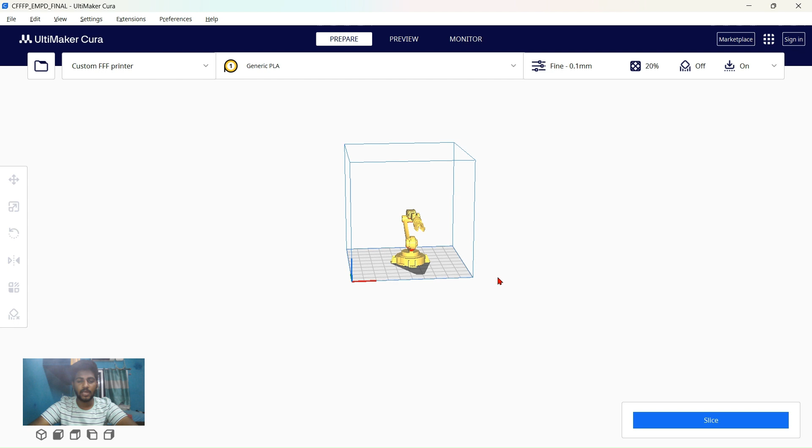In this video, we're going to see the project I have done in my EMPD class. The project name is an 3D model of an articulated robotic arm, which I have done using Fusion 360 software, an 3D modeling software.

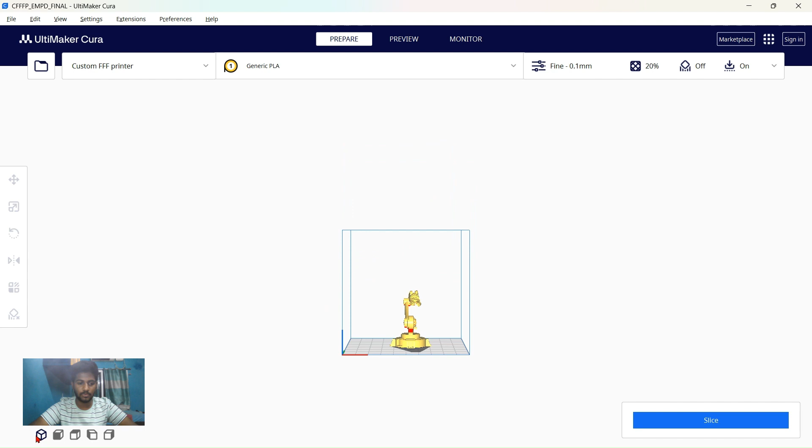After that, I converted the file from F3D to an STL file, and then imported it into Ultimaker Cura. So let's see what you have to do in this software. What you are viewing here is a new project. You can see my project here. After clicking new project...

In this project, you can see the options that are being opened. The first one is move. The move option is for moving the object up, down, left and right, in all directions. The main thing here is we have to place our model inside this cube shaped box, because whatever is in this box is going to get 3D printed.

So we have to be very careful with that. Then we have an option for scaling, so we could make the model bigger, smaller, and so on. After that, we have an option for rotating, which helps us rotate the model to change its angle for printing it in an easier way.

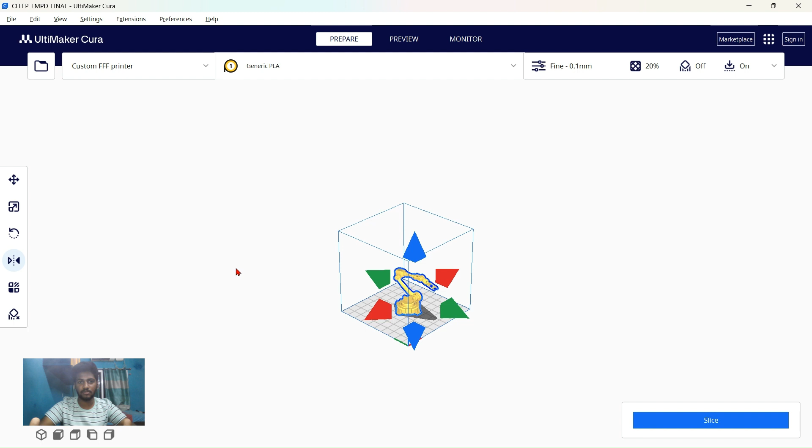Then we have a mirror option. If the model needs to be mirrored, it will be very easy to print two models at the same time which are directly mirrored. And then we have per-model settings and a support blocker.

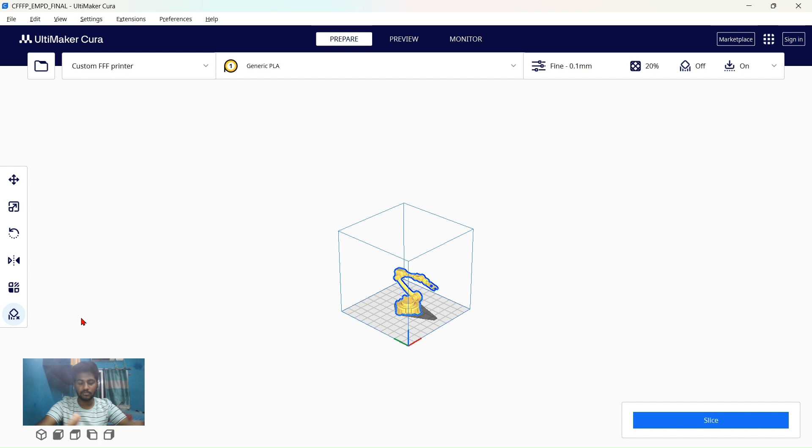The support blocker is for when we print the model, since there are some extra filament structures created that just stick to the model - that's the support. With this we could block the support so it will be more efficient in the finishing process and so on. You can see there are several views down here - this is the front view.

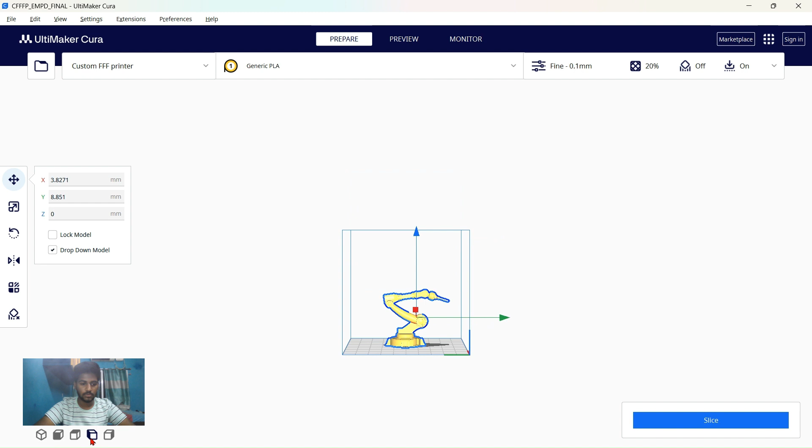This is the top view, and this is the left and right views. So this is my 3D model.

And here in the right corner you can see the slice operation. The slice operation is what makes our model ready for the 3D printing process. So I have done that.

It shows some timings - it shows like 1 hour 16 minutes. That means it's going to take 1 hour 16 minutes to print the whole model. So that's what it's showing us.

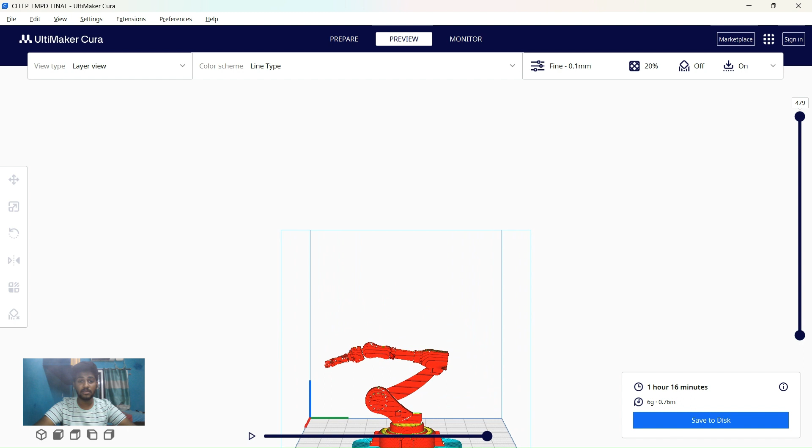After this, we could use the preview option. It goes to preview and shows how it has been scaled, like how it's scaled with different layers for the 3D printing process.

Now we have to save to disk, and then our model is ready for 3D printing. So you use this Ultimaker software to make the model ready for the 3D printing process. This is how I have done my project.

So again, the project name is Articulated Robotic Arm. It's an industrial robotic arm which helps take an object from one place to another and put it in a different track in industries and so on.